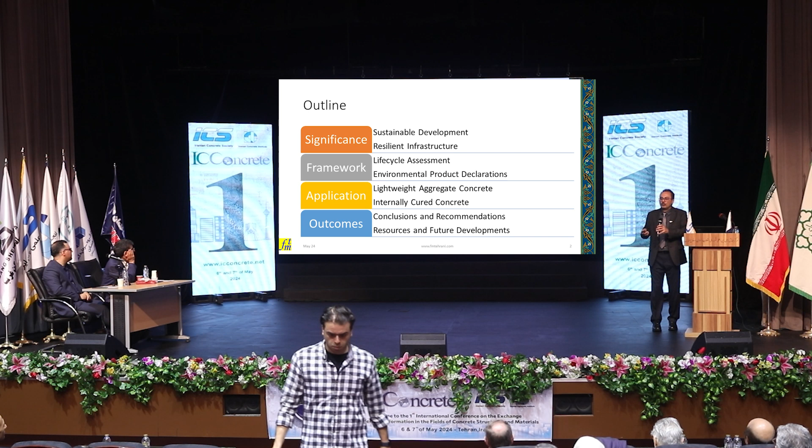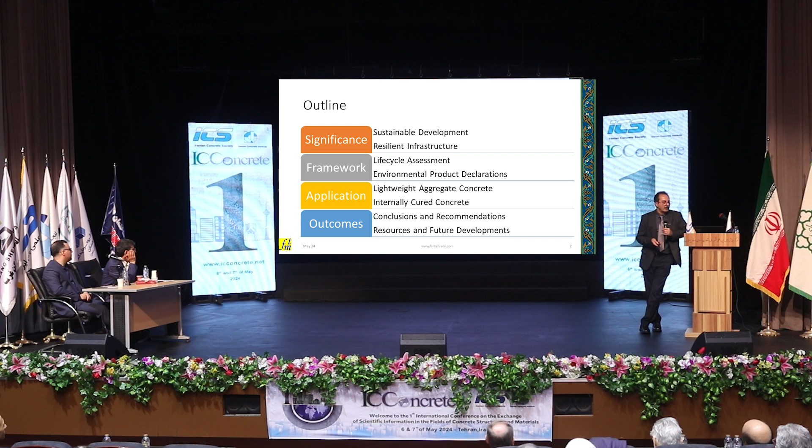That helps you. I'm going to start talking about why this is important, why I'm here, why I advocate for this, and then I'm going to use lightweight aggregate and lightweight concrete as a case study, how we can measure how much damage we are causing, and then how we can address it and mitigate it.

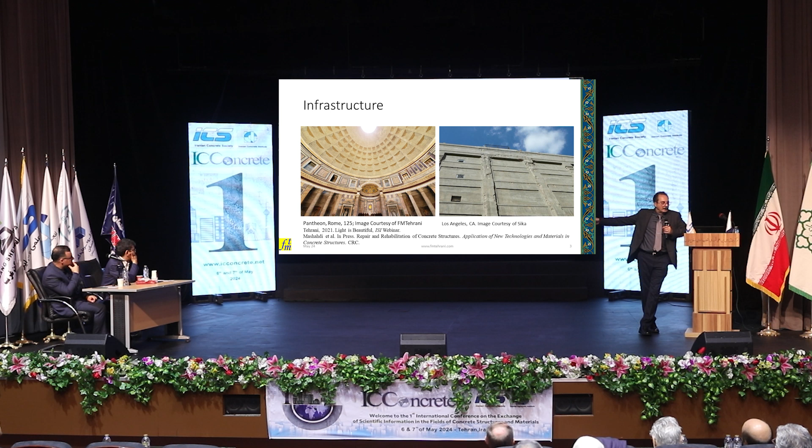The first question that comes up is that the building on the left has lasted for 2,000 years, so how come the building on the right has lasted less than 7 years? There is something wrong with the way we are pouring concrete.

Recently I was planning to use a kind of smart system to magnify this curve, but I worked with a couple of great students and we measured the expected service life of concrete around the world in different climate zones. None of them, whether used in a bridge, a parking garage, or a marine system, all exposed concrete, barely reach the life that we are expecting them to, even if designed based on ACI 318 or any other similar code.

So these are materials and concrete structures built based on the code. And we know there is a very well-known relationship, we didn't have to do research to understand this, that as you increase the service life, the cost goes down, carbon dioxide goes down, energy consumption goes down, waste goes down, everything gets better.

So it's about me choosing my pair of shoes to go hiking. I'm hearing a lot that we are producing an economic, cost-effective material. Cost-effective for what? Good luck going to Everest with a sandal. Yeah, you can go there, but you'll use 2,000 pairs. Why don't you spend more money, buy a pair of hiking shoes, and you don't have to buy another pair ever? I've done it. I love my pair of shoes.

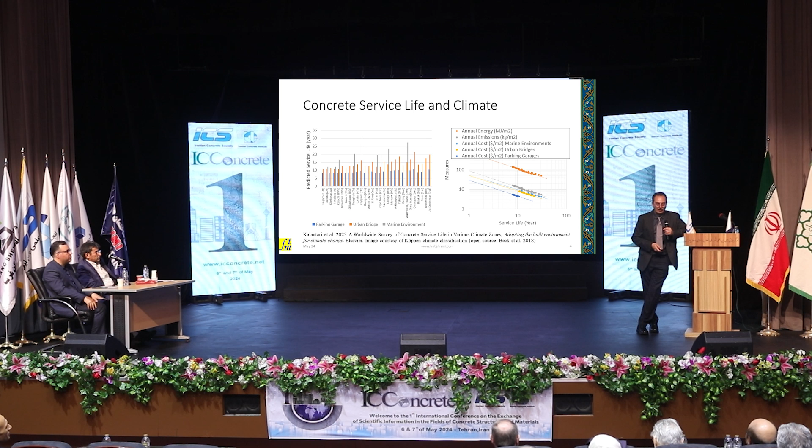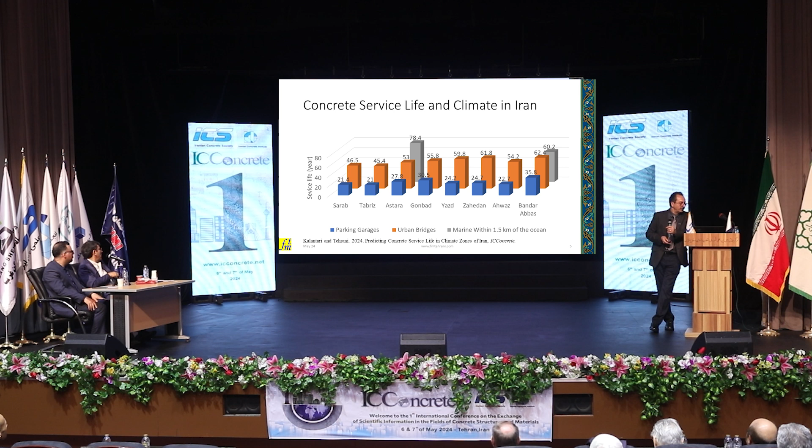So what matters is basically life cycle analysis. This is a blown-up version. The other one was global service life; this is just for Iran. I'm here, so I'm respecting what we can do here. Perhaps we have some concrete that absorbs well, let's say in Astara or Bandar Abbas, doing a little bit better. But in other places, when you're looking at parking garages, for example, no, the service life is poor.

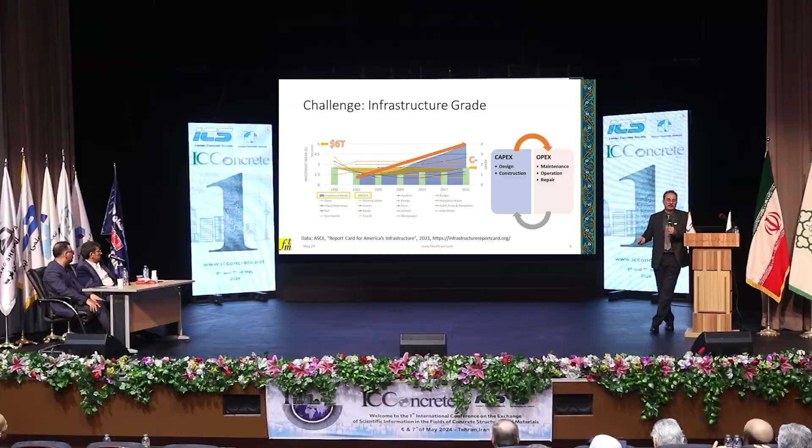And why does it matter? Well, if you keep spending your money to repair and maintain what you have, you never have enough money to put toward capital expenditure. So there is a paradigm shift needed in engineering thinking, to stop thinking that sustainability is a conglomerate of different things where you can negotiate between climate, environment, cost, and social effect.

No, there is a hierarchy. If there is any project that doesn't respect environmental resilience, that project is contributing to the extinction of humanity on earth; that project shall not exist. You never feed your children with poison because it's cheap. Why would you poison humanity?

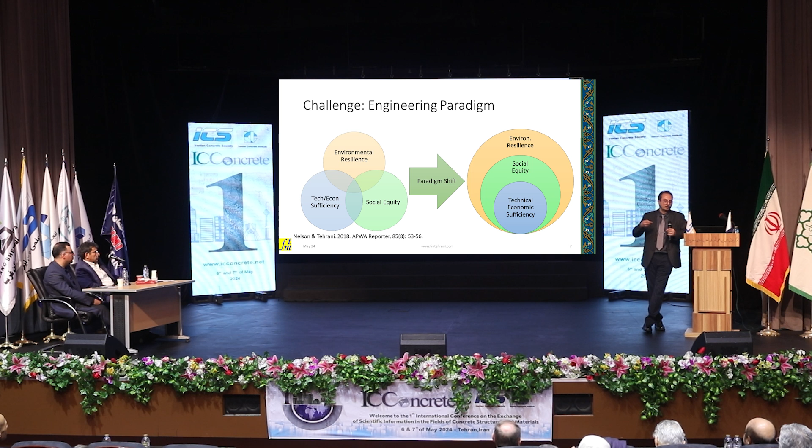That's the hierarchy that engineers are after: first environment, then social justice, then building. There are different measures to do so, like the pyramid of need.

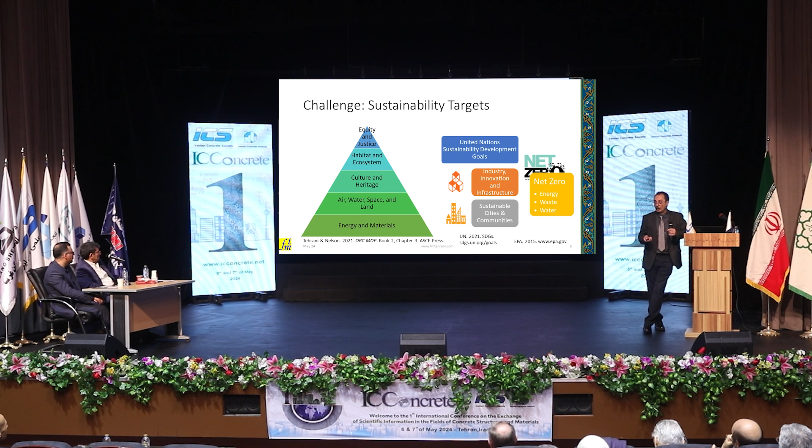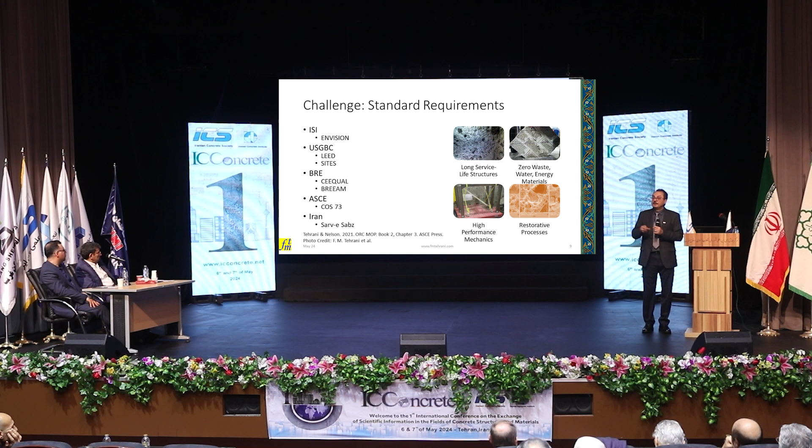There is a net zero system by EPA, there are United Nations sustainability goals, so we can go with all of them, and they are practically very similar. But what we are going to do is use an objective measure. There are different standards; in Iran we have Sarv-e Sabz, which resembles the US Green Building Council. But I'm going to use, and maybe the only one that's mandatory, ASCE Standard 73, which was just published a couple of months ago. But we don't have any kind of requirement for this yet, so we have to understand that.

But how do we do the job?

Well, we do life cycle assessment. Right now there are environmental product declarations - labels, environmental labels, the same way that you buy a carton of milk and it tells you how much calcium, how much vitamin it has. It would tell you the material you're using, how much energy has been consumed to produce this, how much carbon dioxide it has had. So basically you understand what's the damage.

Most producers are doing something that we call cradle to gate. Like a cement plant would say, I know where my material comes from, this is the amount of energy, this is my bill of energy, and this is what happens when I'm bagging the cement and selling to you. But what happens to that cement after, we don't know.

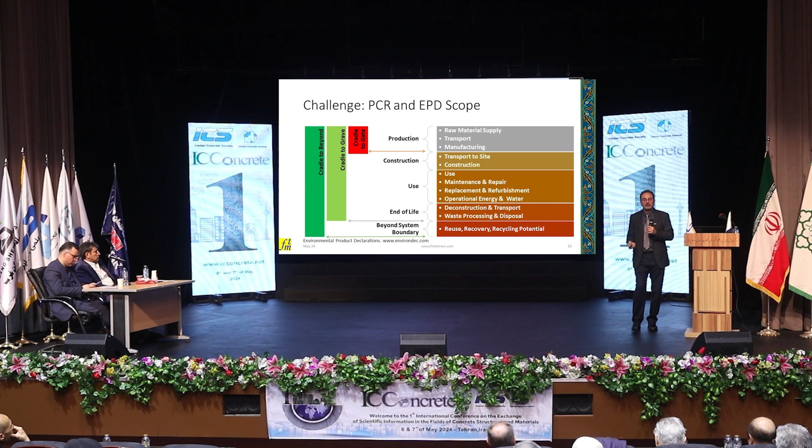We do understand that we have to go all the way from cradle to grave. That means I need to know what's going to happen to the material when I'm putting it into construction, what happens in the use, what happens when I'm decommissioning or deconstructing the structure. I put it into recycle facilities, and what happens after that? Some material, long after you have used and recycled them, is still polluting the earth. So that's basically a bottom-up estimation of what we're going to do.

The example I mentioned is lightweight aggregate. Why is it important? Other than that I'm the director of ESCSI. Well, it's important because when we are producing lightweight aggregate, we also produce carbon dioxide. It's not as bad as cement - it's about 100-something kilogram, not 1,000. But still, does it make sense to produce this type of aggregate?

And they are available around the world. The top one is the one that you see in Iran. A similar one in Italy, Netherlands, a bunch of Europe. And the bottom one, expanded shale, that we have in the United States, Northern America basically.

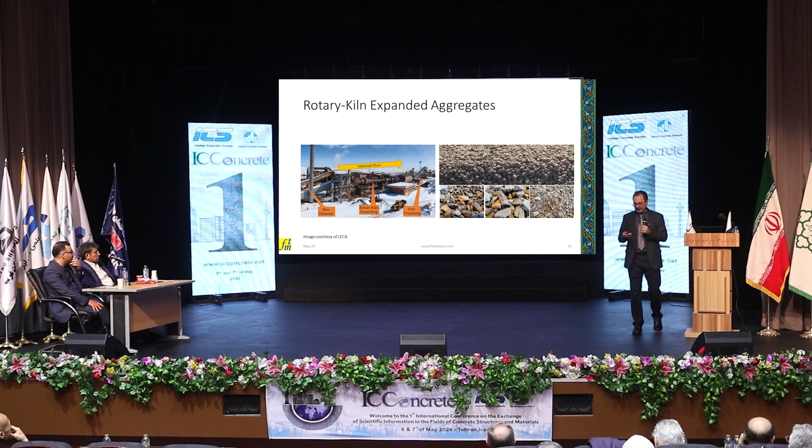The material is basically a porous structure, so when you buy lightweight aggregate, you buy air. There's porosity inside, and that porosity creates a moisture dynamic that's applicable in different applications, like internal curing of concrete, or creating thermal insulation. When you just want to put it in your plant to make sure that when you're going on vacation the plant doesn't die from lack of water, so you don't have to water the plant every day. So different applications, but this ceramic is amorphous.

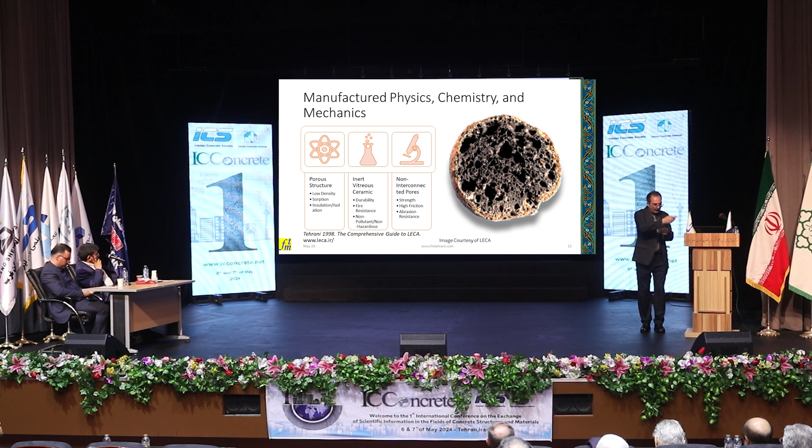We have again done similar things, so we do have good experimental evidence in a report that I published in 2020 that adding lightweight aggregate to concrete does a couple of things. Reduces the density - well, we knew that, it's light. Number two, that many people don't know, it increases the strength. The strength of lightweight concrete is more than the strength of normal weight concrete. And number three, the service life of any sort of lightweight concrete, whether you add coarse aggregate or fine aggregate or a portion of any of them, is more than the normal weight aggregate.

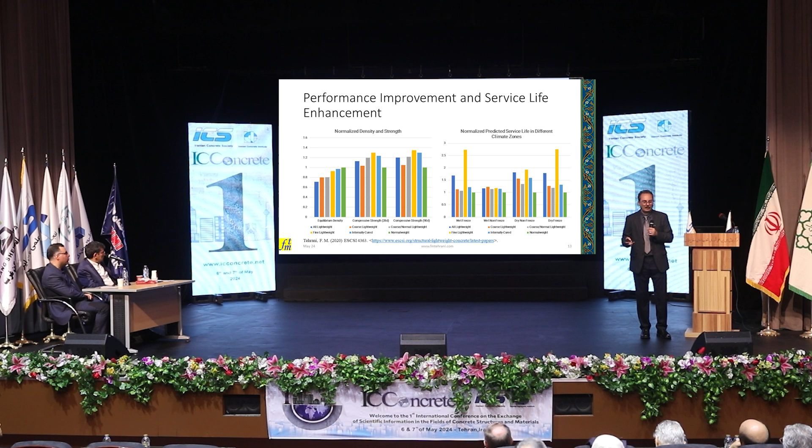There is nothing normal about normal weight aggregate, except the name, right? Maybe we have to change it.

How did we approach the problem? This is basically the setup for the whole process. We start measuring how much energy do we need for a loader or dozer to excavate clay from the earth, bring it to the factory, burn it, heat it up. If you don't know, it's basically heating up the clay, or shale or slate, to 1,000 degrees centigrade, and then cooling that down fast. How much energy goes to gradation, packing, sending to the construction, going to the construction.

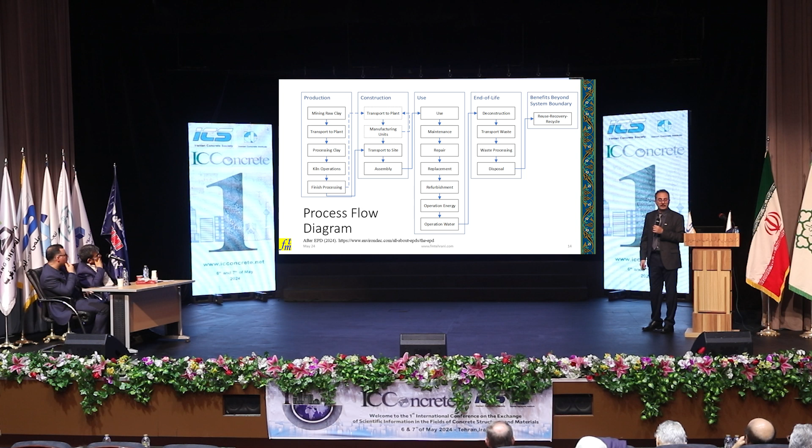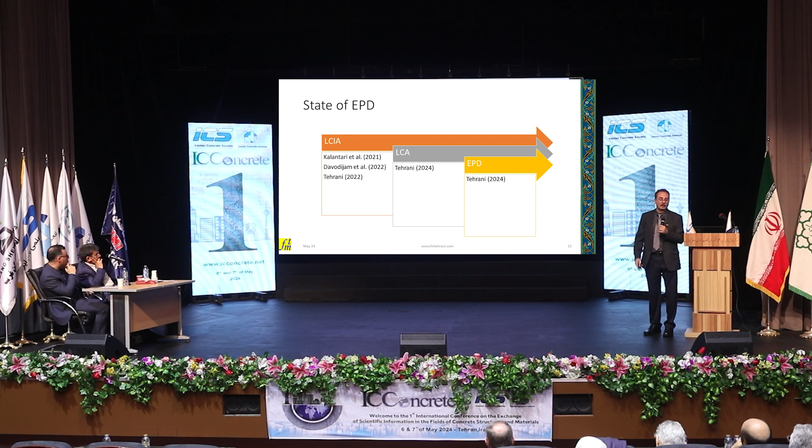If you compare with the rest of the world, there are different types of material, but practically everything is based on tonnage, right? It's weight-based material. Remember, the mass doesn't diminish, doesn't get created, so we can create the flow of the mass and see how much we need. And the more you expand the material, per cubic meter, per volume, the footprint would go down.

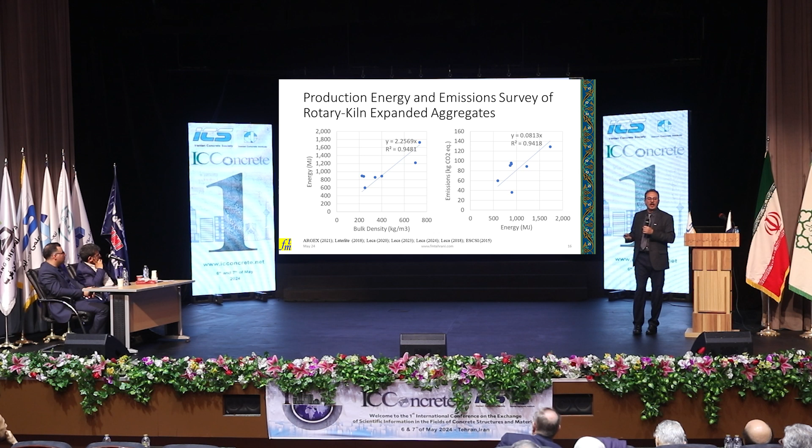That's the whole idea. Let's say you want a cubic meter of sand - how much cubic meter do you need to excavate from the earth? One. How much do you need for expanded clay? One fourth. Why? Well, because we expanded it, so mining goes down. So the amount of energy and emission are kind of commensurate with the expansion rate that you need to get.

There is also an ugly fact that you cannot use solar power to heat up a cement kiln or for lightweight materials, these are heavy duty. I wish at some point we could create some solar panel for that, but we cannot do that.

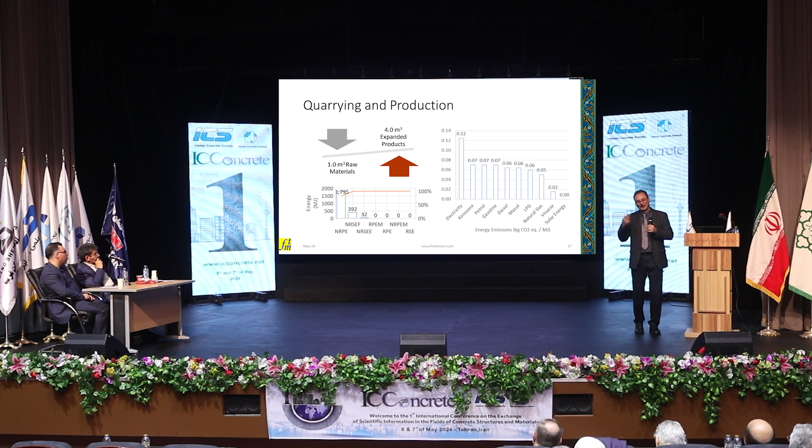So most of the energy being used is non-renewable primary fossil fuel. That's the ugly truth about cement and any gypsum or other factory we have. Each one has a bit of effect on emission. You may not imagine it, but electricity is the worst, because the power plant that gives you electricity is burning fossil fuel too, and wastes some of it on the way to the plant. So things are a little different than they appear.

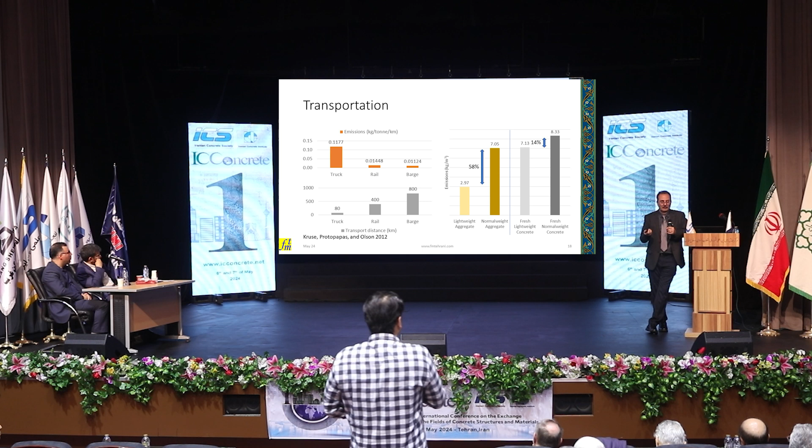On transportation, you know that if the load on a truck is lighter, you spend less energy, less fuel. It's a no-brainer, everybody knows this. You lighten up the load on the truck, you reduce energy and emissions.

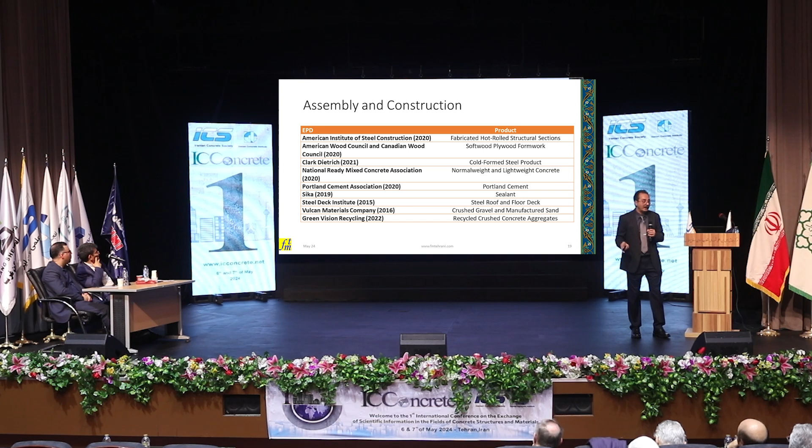When you're getting to assembly and construction, it's not just concrete, it's not just the aggregate, it's the steel structure material too. You have to add up everything else, all the savings that you have.

So I'm going to give you three case studies. Case study number one, something most people know: what would happen if you replace normal weight concrete with lightweight concrete on a slab, like a composite slab on a building done very differently. There has been a proposed study done by Walter P. Moore, so they did the structural design. I'm borrowing a lot of their material and converting it to environmental footprint. They considered three different case studies.

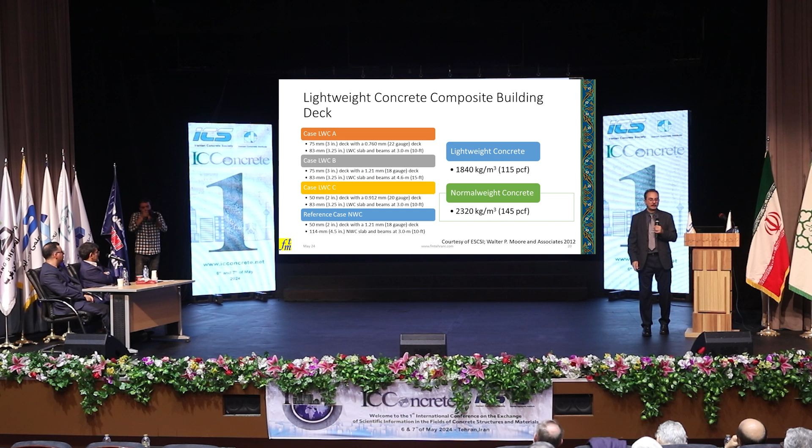The bottom one is the normal weight, which is not normal, and we are reducing the weight from 2300 to 1840. So what happened? At the bottom you see the color coding, and you're looking at the amount of material used for this concrete. Remember, if your slabs are lighter, you need less skeleton, less footing, less column, less everything. So the consumption of material goes down.

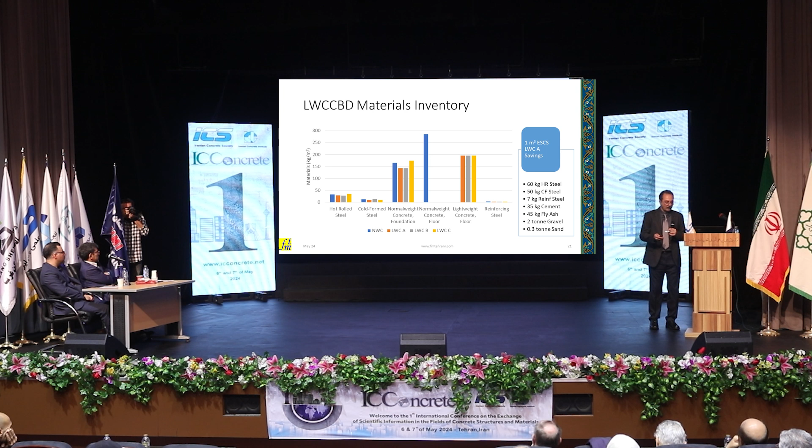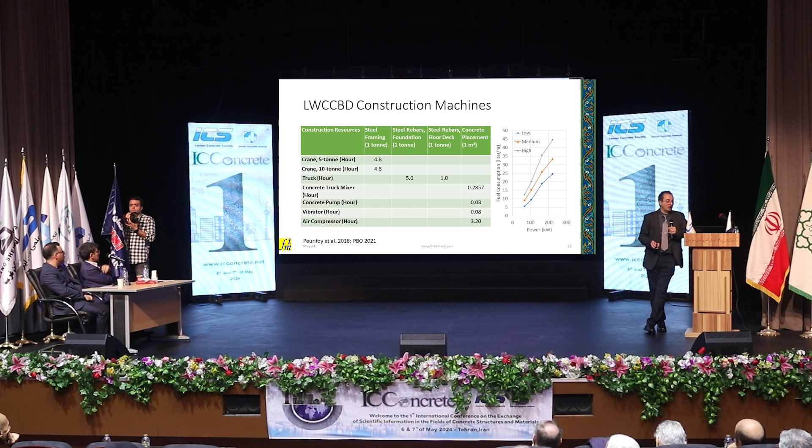How about construction? Well, if you have less steel material, you need less crane time, and the crane also burns fossil fuel, by the way. So you're again saving. This is our energy calculation.

Even in D, you have to spend energy. You have broken concrete, you want to convert it to aggregate, you need a crusher. Guess what? That crusher needs diesel fuel. You're still polluting the air to recycle concrete.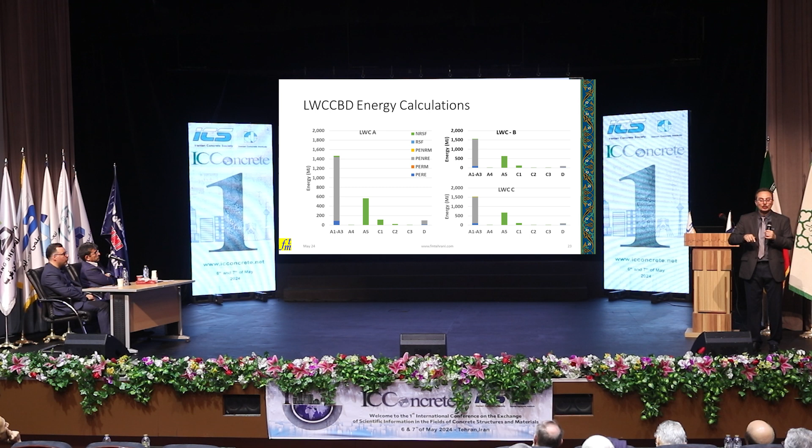So that basically gives me something I have to say right now. All those people who say net zero — zero doesn't exist, you cannot have zero energy. If I produce a material and I burn the material to extract the same material, I'm not going to get the same amount. It's impossible, net zero doesn't exist. But in comparison, we can do something better.

So now I'm comparing those three scenarios the structural engineers gave us, Walter P. Moore designers, with conventional or normal weight concrete. You can look at it: we are reducing carbon dioxide, we are reducing energy, emissions, waste, and water. All of them are down.

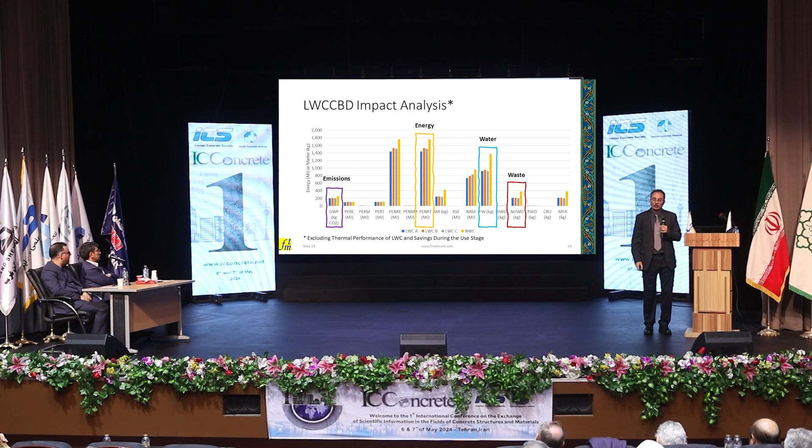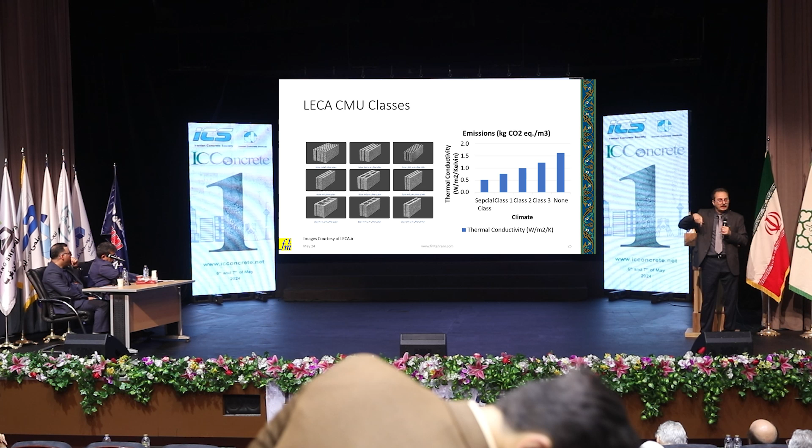Another example is masonry systems. Most non-engineered buildings use at least some sort of masonry units. They are light, again, and they provide thermal insulation. What happens to them? According to chapter 19 of the Iranian National Code, you can basically categorize and classify different kinds of units based on how much thermal insulation conductivity they meet.

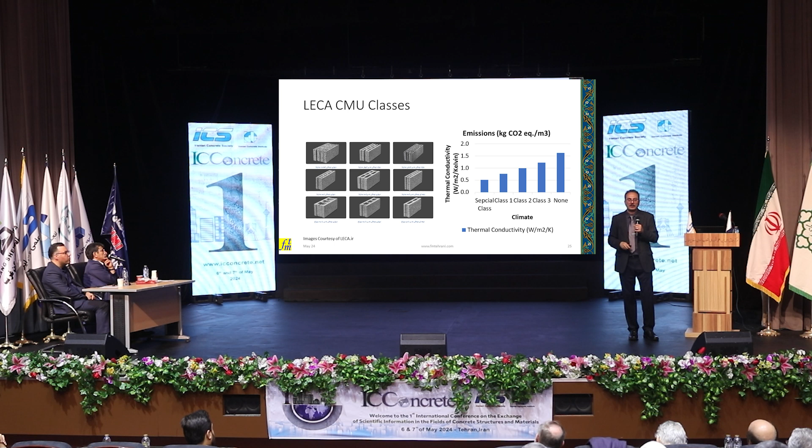So I've created class 1, 2, 3 based on chapter 19. Special class is the super thermally insulated material — they go above and beyond the code. And then I have some I call 'none' — meaning they're like partitions, not meant for exterior walls. So the Iranian National Code doesn't allow them to be considered thermally insulated material.

So we went again — the great paper by Dr. Sadeqi that I borrowed for this project — we went through around Iran and calculated the number of degree days for heating and cooling. Let's say the temperature is supposed to be 25; every hour the temperature outside goes above 25 you need to cool it down, or if it goes under, you have to heat it up. We calculated this for all cities. We can take the average or go locally, it doesn't matter.

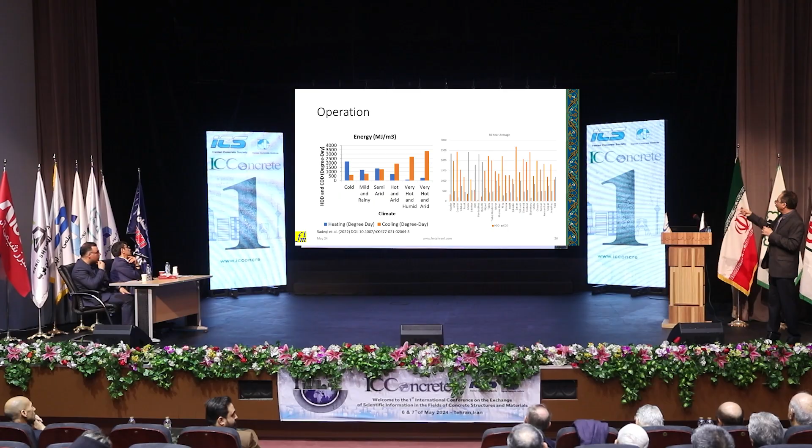Also, we would calculate how much energy and emissions go into construction of the material. Which one is safer, lifting heavier stuff or lifting lighter stuff?

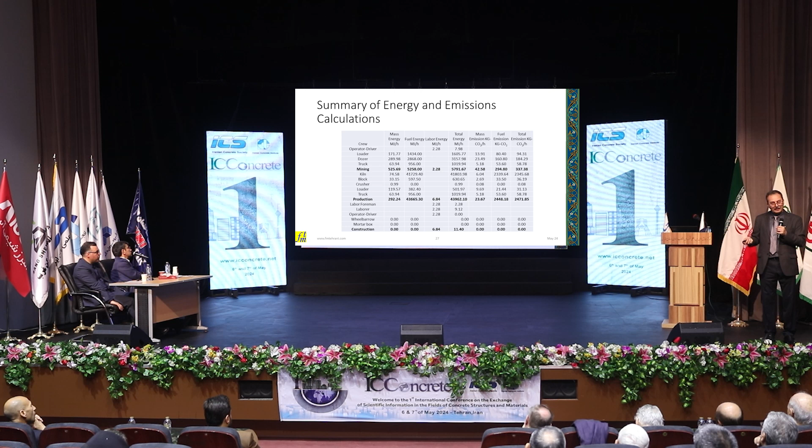I don't have to answer that. There are some good side effects that we are not considering, but right now we are just crunching numbers.

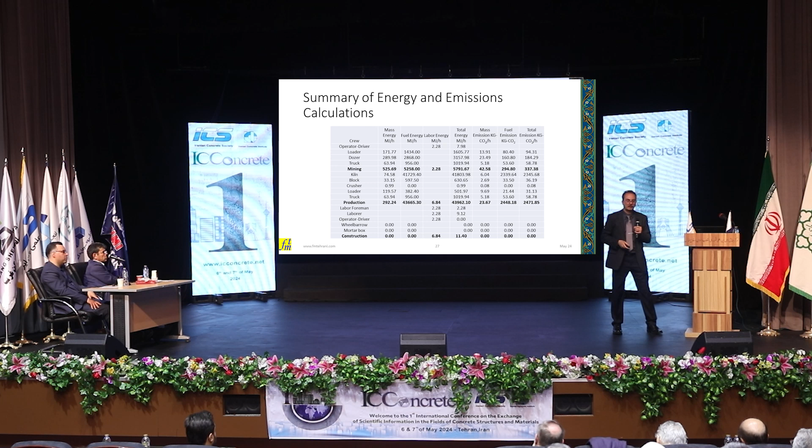What's the source for this number? Cost analysis. In Iran, we have a contractor syndicate, the syndicate of building contractor companies. We have done this since I was a student, even before I became a civil engineering student.

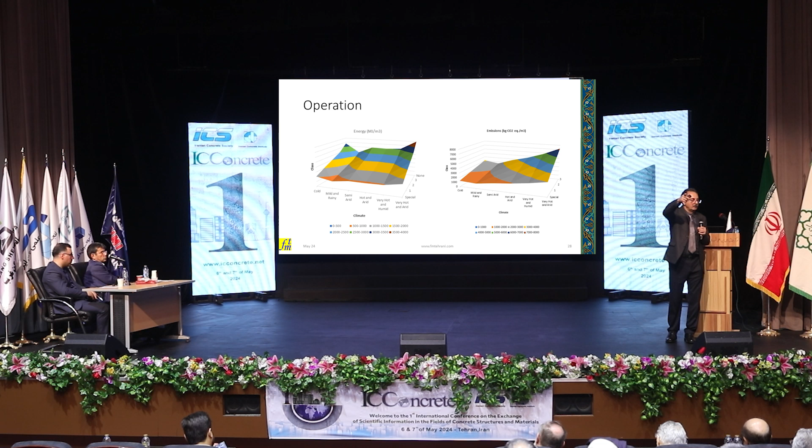Then we can go around the different classes and different climate zones, right? So I can talk about what would happen if you use block number 3 in Abadan, or how about if you put block number 7 in Astara? It's computer-based. We have pages and pages of this calculation.

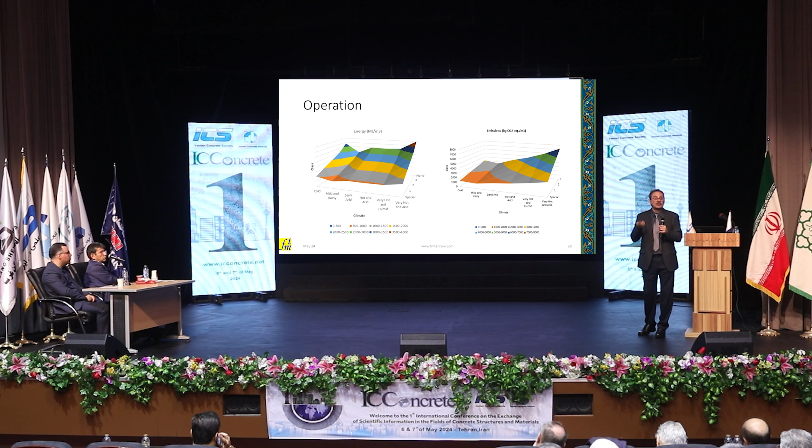Here I'm just showing you average values, but I think an engineer, the engineer of record, shall calculate this for her own project in every location.

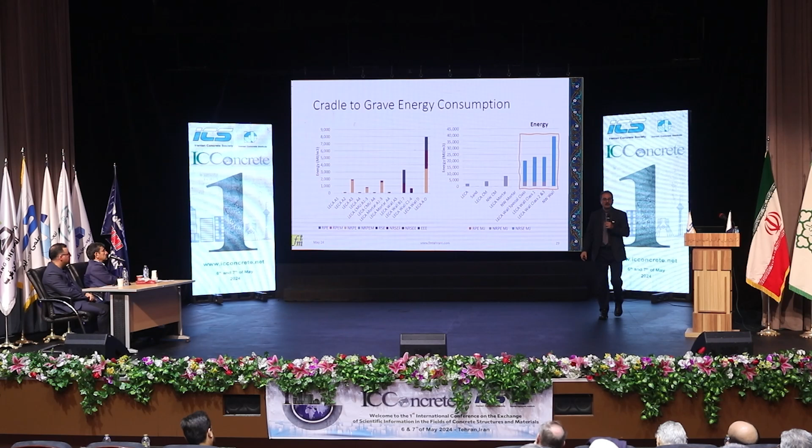This is a summary of calculation. Again, you are looking at the values, and this is maybe the major one. On the left, you can see that there is no zero—you keep calculating, spending energy and emissions. But on the right, you can see how superclass, class 1, class 2 and 3, and normal weight wall behave.

So it is true, maybe for a certain amount of aggregate, you need to spend 1 kilowatt of energy to produce it. But throughout the life cycle of the building, you save one magnitude of order higher than that—10 times saving.

Now think about those people who produce material that's cost-effective at the time of production—they are betraying the industry. They give you something that saves you cost now, but they charge you 10 times later. There should be something like a criminal charge for this.

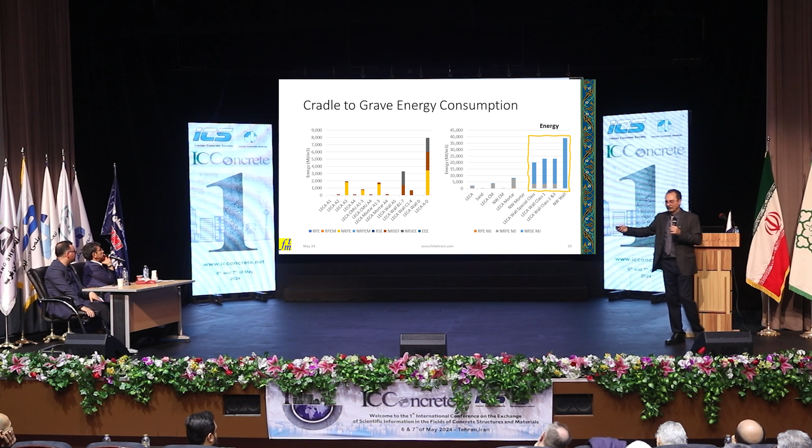Third one, things get better. Now we are talking about internal curing. What's internal curing? Well, you know what curing is. You combine cement and water, and for given volumes of those materials, the volume of hardened cement is 6%, 7%, 8% less than the total volume of water and cement. So concrete shrinks.

To compensate, and if you don't, it's going to crack. To compensate, you add water. How do you add water? According to the standard, we have all done it in our concrete technology courses in academia.

You submerge concrete into the water. Perfect, done. We did it. I got an A from Dr. Khalou. Perfect. But can you put a dam underwater to submerge it and cure it? How about a road? How about a retaining wall? How about buildings? No.

You put some sort of material, like burlap, for example. You put moist burlap under that. I can give you evidence that water would barely travel into the concrete more than 2 centimeters.

So if you have 4 centimeters of concrete, good luck—the bottom is going to desiccate. So that curing is now, in ACI, the American Concrete Institute, is called—

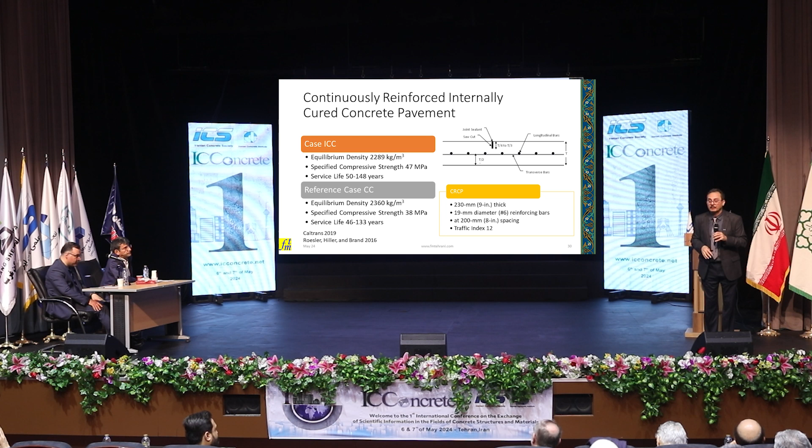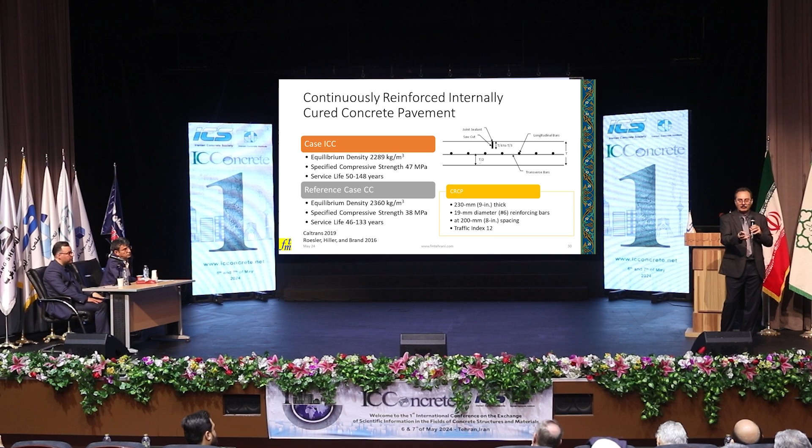So what do we do? We put fine, lightweight aggregate that can absorb up to 15% of their weight in moisture. We submerge them for 72 hours to make sure the water goes in. We replace a certain amount of the sand, calculated with that value, with that lightweight aggregate. So when the cement wants to cure, there is fine lightweight aggregate next to the cement within that 2 centimeter region—we hydrate the concrete from inside out.

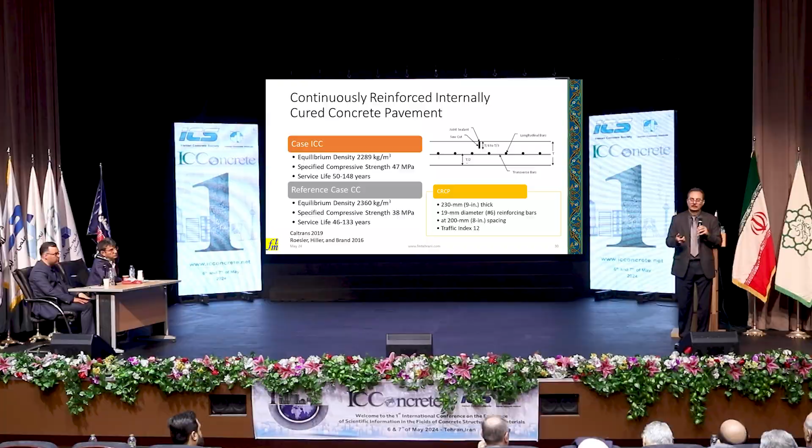Result: strength goes up again. Please never ever tell anyone that lightweight aggregate has less strength than normal weight—please don't, the strength goes up. Service life goes up too. How come? You have more hydration, you have no crack.

This one, zero works. There is zero cracking, and there would be no penetration of chloride ions into the concrete, ever. Done.

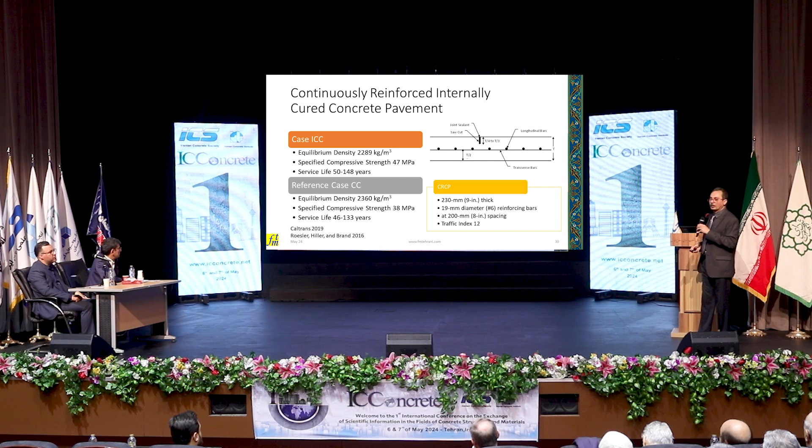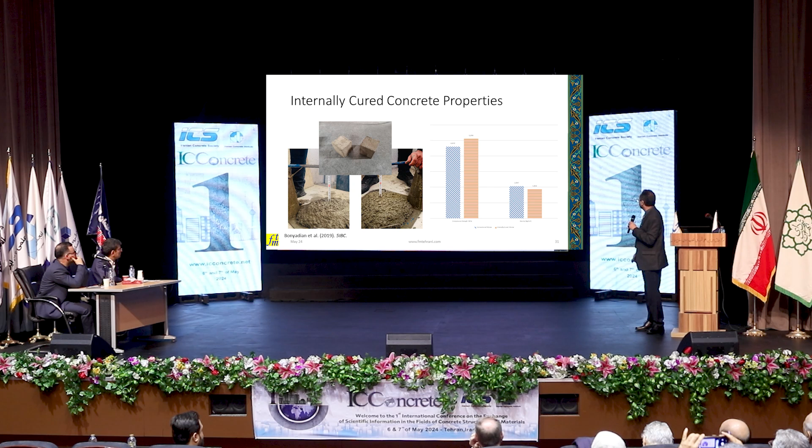But basically, we are changing the transport properties of concrete. This result, again, you can find in my 2019 report.

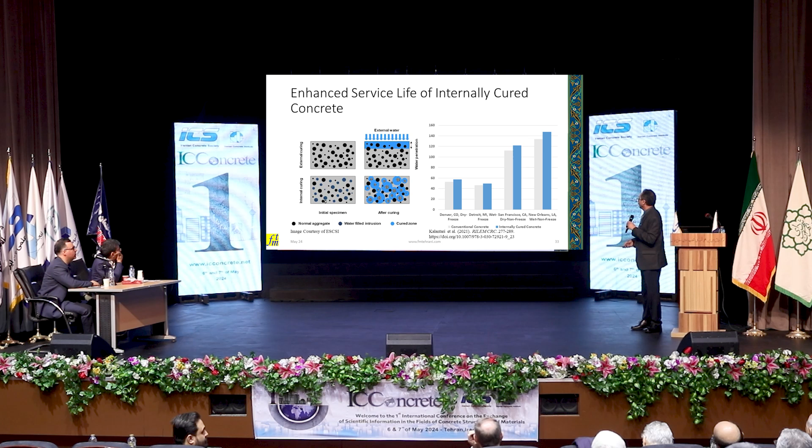Well, I talked about internal curing—that's internal curing, the strength goes up, I've already talked about that. There are other advantages too.

Let's say on a roadway, what will the spacing between your joints be? It depends how much cracking you expect. If you don't expect any cracking, well, you can increase the spacing. There are minor advantages as well.

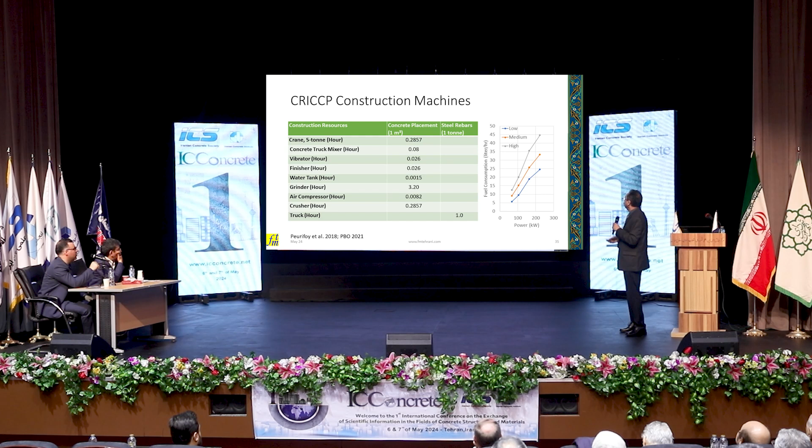And after doing all the number crunching, we get to this: you can reduce the cement. If the strength of concrete is going to go higher, well, you can reduce the amount of cement by 50 kilograms per cubic meter—why not? Number two, you say, no, I want to keep the cement—that's fine, reduce the thickness of the slab. Either way.

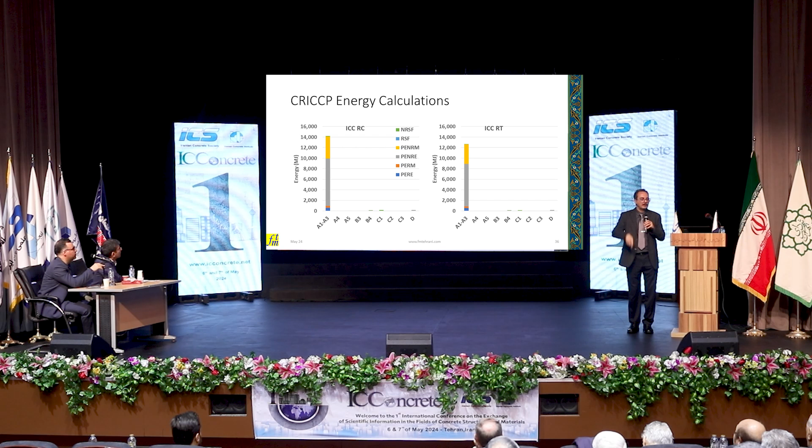Dr. Tehrani, only 2 minutes, thank you. Of course. This is the reduction—emission, energy, water, and waste.

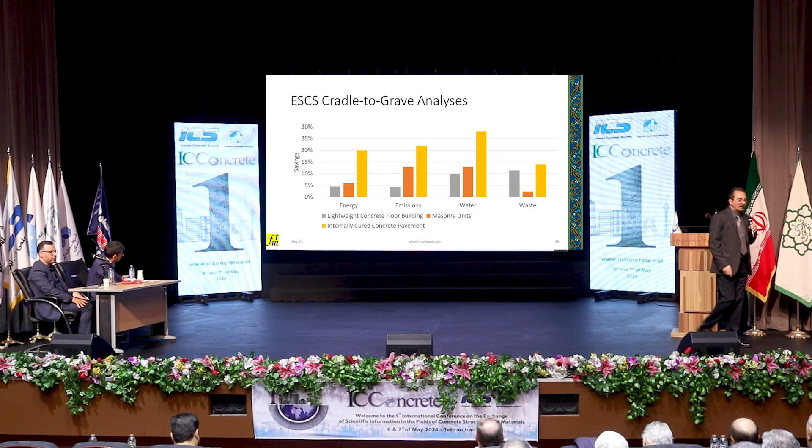So let's compare everything together. The more sophisticated you get, the more saving you are going to have. If you are counting only on lightweight concrete because it's light, the gray one gives you the saving. You get smarter, you calculate thermal insulation, you can save more. You get smarter, you hydrate cement with lightweight aggregate, it even goes higher.

There is the conclusion, that's it. So it's a life cycle analysis that would allow us to see really what's happening.

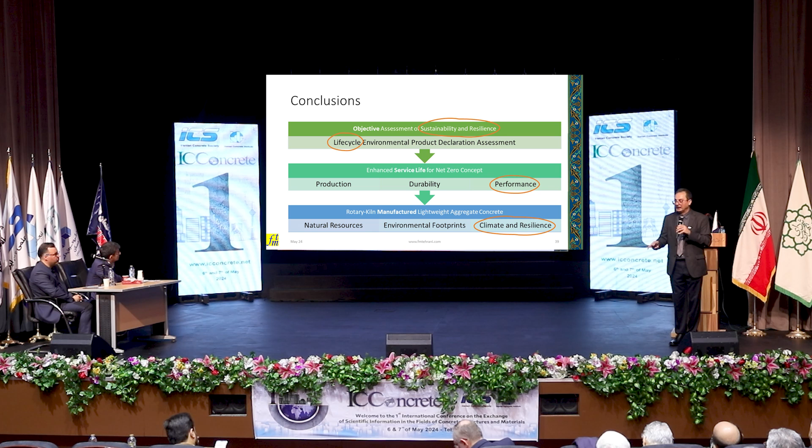Never ever buy a sandal in a hiking shoe store. Never ever buy cheap cement or cheap aggregate. We have to always look for the life cycle.

A bunch of reading, I can come back to this if you want to scan all the QR codes. Spent a good amount of time. I didn't know we can copy QR codes.

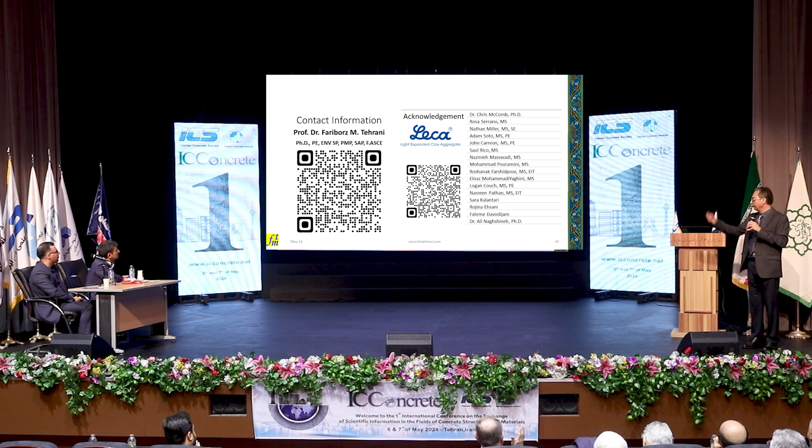Thank you very much for your nice presentation. Only one question, please. Yes?

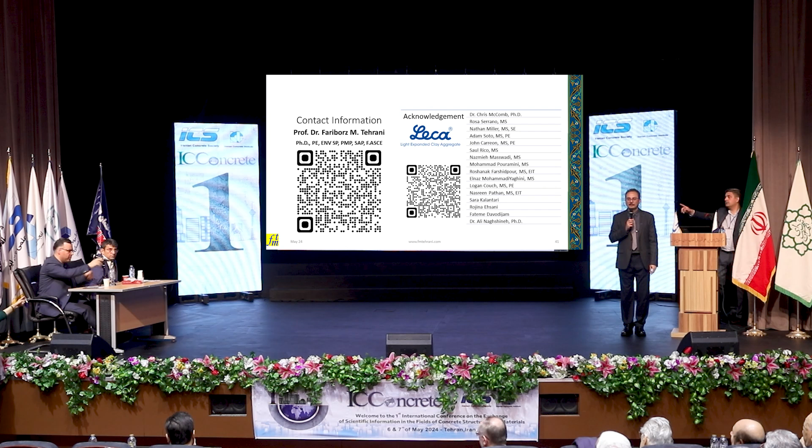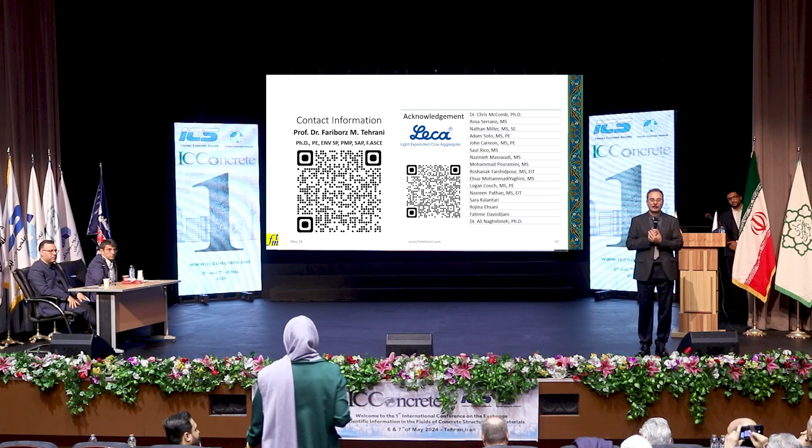Thank you very much for your informative presentation. My question is about the relationship between the compressive strength and density of concrete made with lightweight aggregates. Normally lightweight aggregates have less strength by themselves, so there should be an optimal density. For example, in my experience, when the density goes down to 1800 or so, the strength wouldn't be affected that much. But do you have any data or mix design relating to the strength? You mentioned that it increases the strength. How so?

We have two different classes of lightweight concrete: insulative lightweight concrete and structural lightweight concrete. The insulative definitely has less strength, it's not designed to be structural, so that's totally put aside. When you are using internal curing, you're only replacing a third of the sand with fine lightweight aggregate. There is no change in the strength - there is better hydration, the strength goes up. So we have no problem with that one.

Your question applies practically to coarse lightweight aggregate concrete, and there is a limit. I would never say that you can reach lightweight concrete to 12,000 psi - never. But 6,000, that's the standard practice. One of the problems I have in my research is that when I ask plants to feed me with their concrete, they say, sorry, we only have high strength lightweight concrete. We do not produce normal strength lightweight concrete - nobody buys that, everybody wants high strength. So they go with lightweight concrete, and then how do you meet this?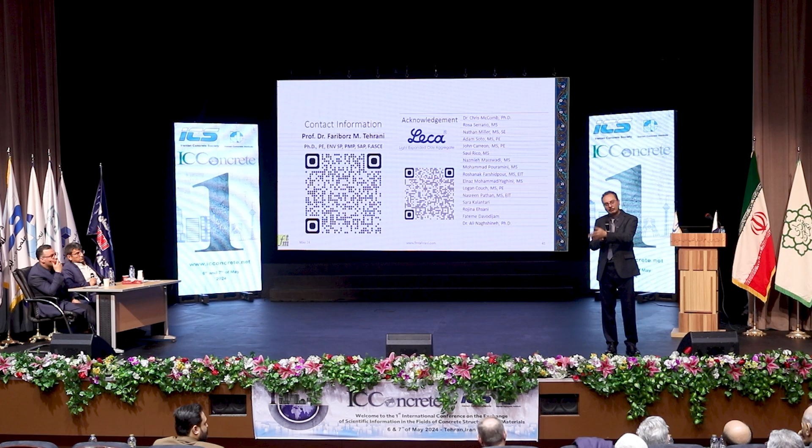As a member of American Concrete Institute Committee 213, which updated the new code, the lambda value in ACI 318 is simplistic and super conservative. I do not agree with that. Actually, a good student of mine has already published two other papers in the same conference, you can find it. We show there that in ACI 318, they say use this for lightweight concrete, but there is a difference between different types of concrete. You cannot use the lambda for expanded shale clay slate the same as slag, or the same as expanded fly ash, or pumice, or God forbid if anybody uses scoria - please don't, for scoria. So there are differences, and ACI 318 is blind to the source of aggregate, and that has caused a problem. AASHTO has already started claiming that lambda values are not correct, so the new AASHTO is out, they have new data. What we did, we went one step above AASHTO, and we discriminated between different types of aggregate, and we showed that if there is going to be a lambda value, it cannot be one number for all of them. So that would also help a lot with people who are dealing with bonding and tensile strength, shear strength, which are super important.

Sure. Thank you, thank you so much for sharing this session.

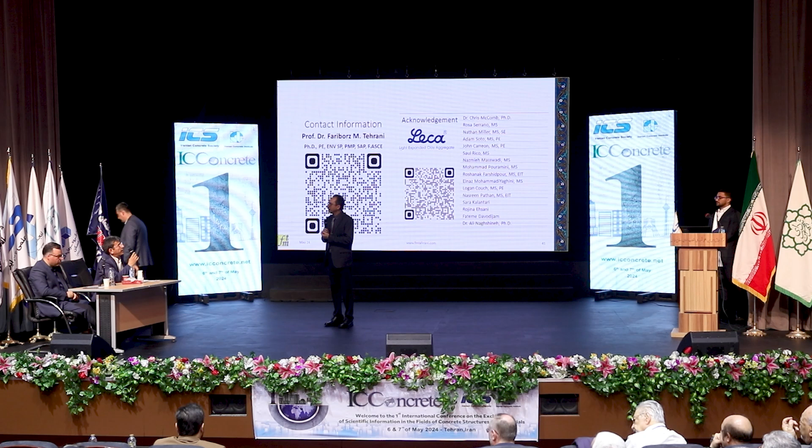I think it's true just for low water cement ratio. Internal curing is necessary just for low water cement ratio, less than 0.4 or 0.5. Normally in our concrete, the water cement ratio is higher, so normally you don't need internal curing for most used concrete.

Somehow, for example, for pavement, you have a point. If you don't mind, I'm going to repeat this in my own wording: as the water to cementitious material ratio goes down, you expect more shrinkage, more early age shrinkage, so shrinkage becomes more problematic. Therefore internal curing is going to contribute more to preventing that.

But look at any foundation with 3,000 psi concrete placed every day, anywhere. They all crack. Is that a problem? Not exactly because of shrinkage. Maybe we're talking about cracks you cannot see. How do we measure service life of concrete? If you measure the shrinkage and chemical shrinkage for high water cement ratio, it's not a lot, it's limited.

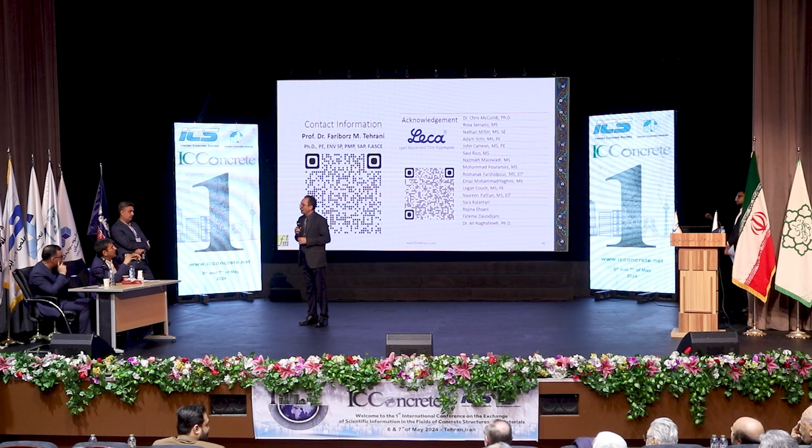Next, another thing: if you introduce the seismic issue, lightweight aggregate structural concrete can reduce the shear force, so it would be better. Seismic issue can be interesting also for service life. Correct, it's just a comment. So lightweight also helps with the inertia.

Well, at least in my market, in the United States, and during service life discussions in Iran, they would call me selfish if I talk about seismic because it only happens in California. The rest of the state is pretty much not affected. But you have a point, yes, seismic is something that we would know.

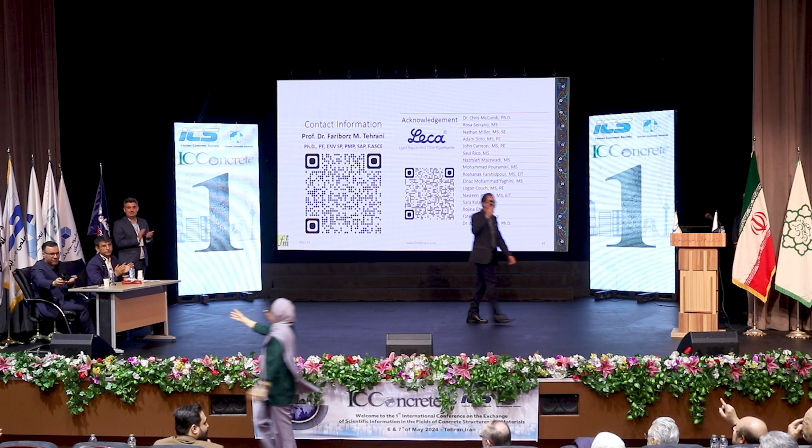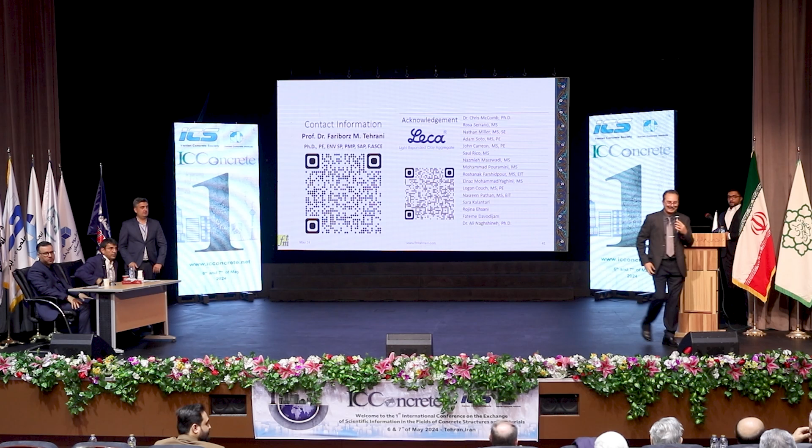Dr. Tehrani, thank you. Thanks for the very nice presentation. In the first, third, or second page you showed that you have used it in garage and parking.

Did you test the crushing and abrasion and compare with normal concrete? Not in this research, but we have done abrasion resistance testing for other purposes, so we have papers I can send to you on floor finishing, because most abrasion issues have something to do with the screeding and the floor finishing practices. For that reason I love internal curing, because it gives you exactly what you need to finish the material properly.

So if you test lightweight aggregate using a Los Angeles test, you might be surprised to find you get a little bit more crushing in that test. But now in transportation, we basically either don't use the Los Angeles test or we correlate the material with other methods, like the Micro-Deval abrasion test. Because the reality, when you have truck traffic on a roadway, what happens is totally different from the Los Angeles test. So it's not about crushing, it's about abrasion, as you said.

Maybe I can give you an anecdote: our aggregate is qualified for high friction surfaces for chip seal, it's approved, so it's one of the things that creates additional surface friction. The reason is that, because of the porosity, think about decorative stones - they're highly polished, everything is beautiful. This lightweight aggregate is porous, it has a lot of holes. You cut it, you get a lot of roughness. That gives you enough friction for roadways and those applications.

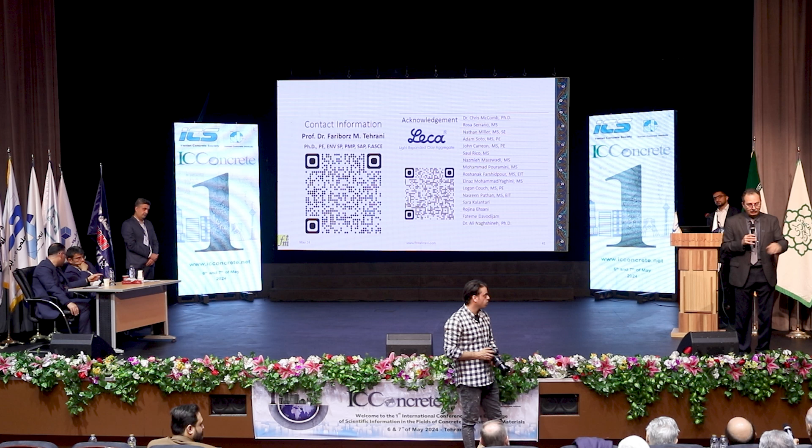When it comes to abrasion though, the reality is that you have concrete cover. If your concrete cover is well cured, well finished right after placing, you never reach the surface of the aggregate, so you are pretty much safe. That's a parameter in designing roads, definitely. Thank you. Of course.